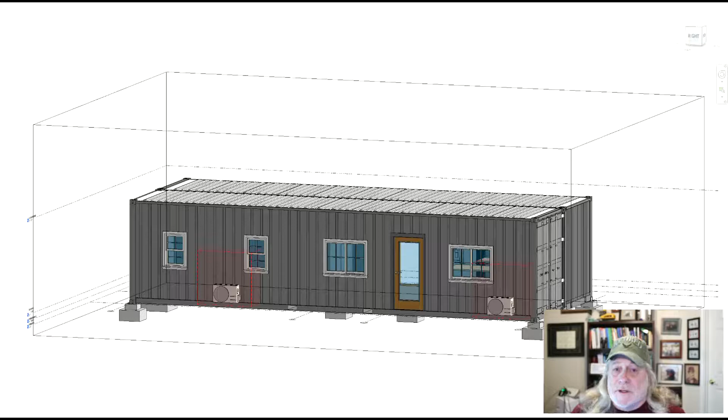The client's name is Across the Way Custom Construction, which is a bit of a tongue twister for me, so you have to forgive me for that. And let's go ahead and get started and talk about this.

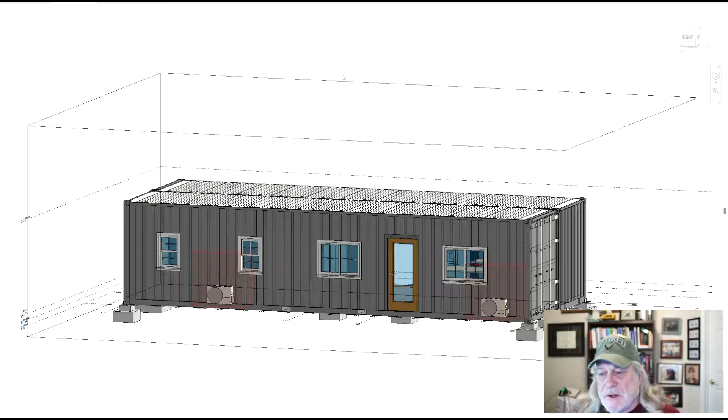Okay, here's our basic structure, and I'm taking a look at it from the outside and got a 3D view here. So let's go ahead and take a look around it. This is basically just two containers together. Two 40-foot, what are known as high cube containers. They're 9.5 feet high instead of 8.5 feet high, which is a standard cube container.

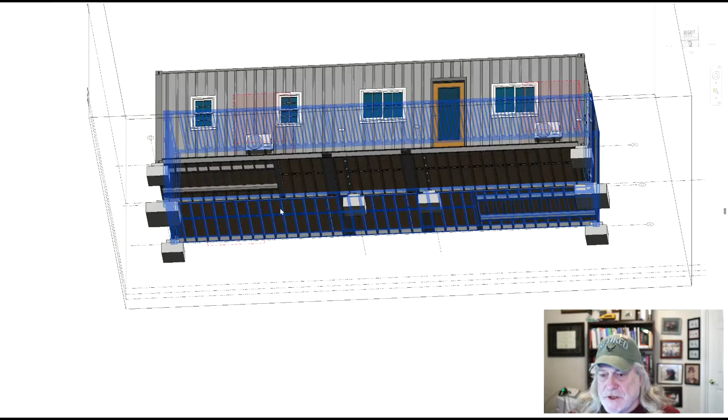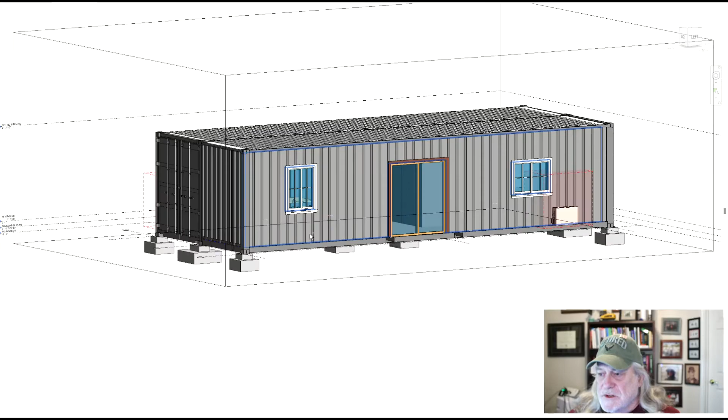I've got foundations at the corners, obviously, and I had to put two foundations along the center line because we're taking out a lot of the wall in the center, so that eliminates a good deal of support we have along that axis. And pretty simple, just a couple of windows, sliding door in the back, a couple of windows in the back. It's not going to win any architectural awards.

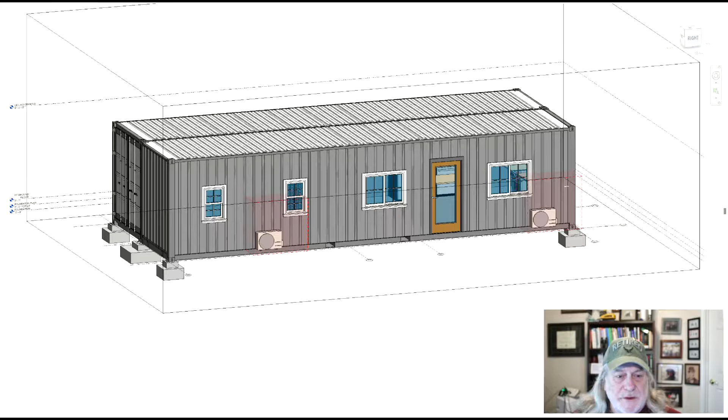There's probably those of you with architectural background that are having a fit about this right now, but you know what? It's inexpensive to build, and it's very useful. So let's take a look at the ground floor of how it looks. Oh, thank you. And we'll save the project.

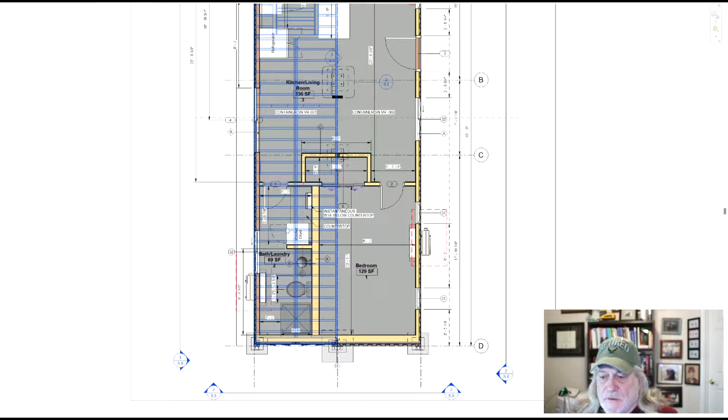Okay, basically we've just got a simple kitchen. Let's go ahead and color it in, see if that makes it easier to see. Yeah, there we go. It's simply a kitchen with a dishwasher, range, sink, got a little island here, and it's one bedroom, and you have a bathroom with a laundry room with the washer dryer combination, and I'm using an instantaneous water heater.

And the reason I'm doing that, let's see if I can get a pointer out of this thing. I can't. Okay, well, sorry about that. I'm using a washer dryer combination to cut down on the space, and we're using an instantaneous water heater below the countertop here that we've got next to the washer, because of two reasons.

Instantaneous water heaters take up much less space than the traditional water heater, and also for energy conservation. You're using a lot less energy with an instantaneous water heater. I like them much more than your traditional tank water heaters, because you're not heating 40 gallons of water 24 hours a day when it's used maybe 2 or 3 times a day. So it's a much more efficient system for energy use.

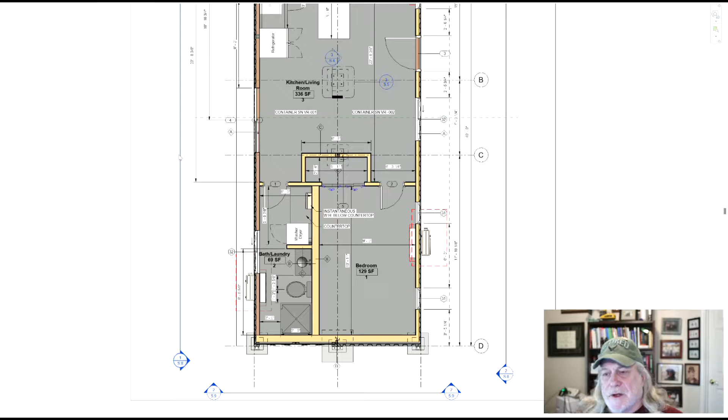The downside is, of course, it takes a lot of electricity, so I had to do quite a bit of wiring. It's better if you've got natural gas, but we're not putting natural gas in these units. These are total electric. And there's really not much else to talk about here. I have a ceiling plan that's here, and just our different views that we've got. That's about it.

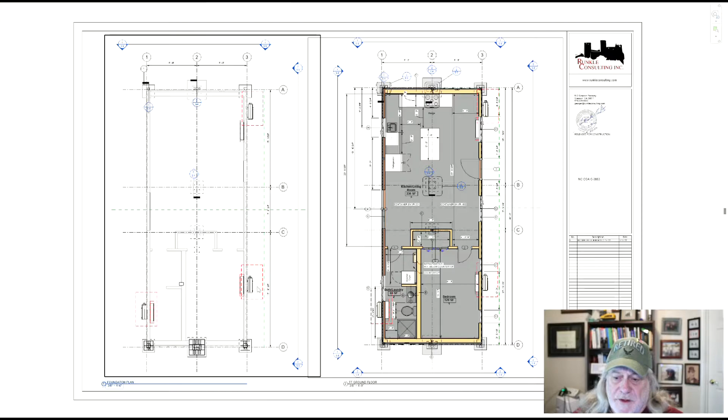I'll go ahead through the plans here, since this is turning out to be a very short video. We'll go ahead and show some of the plans that we've got. This is your foundation plan over here. Very simple foundation plan. You got your ceiling framing. Very simple. There's not much to it. The way the ceiling is framed, let's go ahead and take a look at that.

Also, what I'm doing is I'm stiffening up the center member here with some angles, and then I'm just using standard Simpson hangers to hang the 2x joists that I've got. And since I'm not doing anything structural with the framing, I can use cheaper framing. I'm using number 3 grade for the ceiling joists because I'm not carrying anything. And I'm using stud grade for framing out the walls.

And we've got some pretty serious insulation here using closed cell polyiso. I kind of like the idea of using the closed cell insulation instead of using the batt insulation because it forms its own vapor barrier. What I'm kind of concerned with is getting condensation right on the inside of these corrugations, and then the insulation gets wet,

and that is probably not going to happen in Arizona because this is going to be hotter than hell. But we could possibly get condensation on the other side right against the sheetrock. And if we've got a closed cell insulation, we don't have to worry about dampness getting into it and all the problems that it causes.

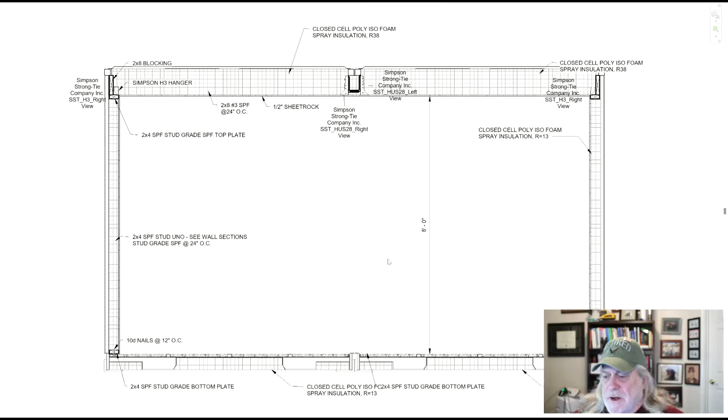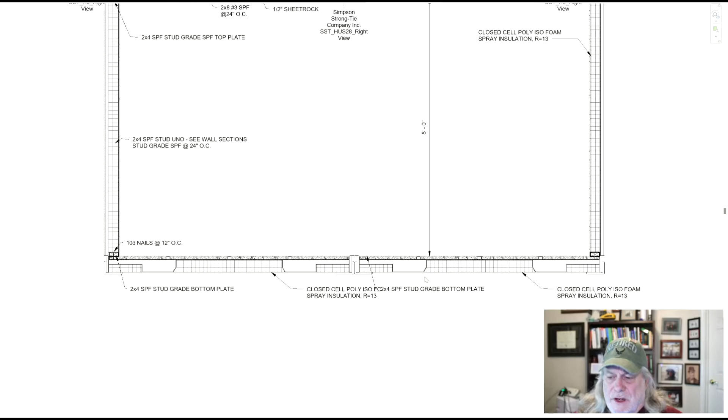And also at the bottom, we've got the closed cell poly insulation. That is critical. You've got to insulate the bottom of these containers because otherwise your floor is going to be hot and it's going to heat up the inside. So it's going to have to be sprayed from the bottom, which is going to be kind of a headache in manufacturing, but it's not something that can't be done. You can lift this up with a forklift, get underneath of it and spray and get it insulated. The other thing is for energy code, we've got to be insulated here anyway. So that's pretty much it.

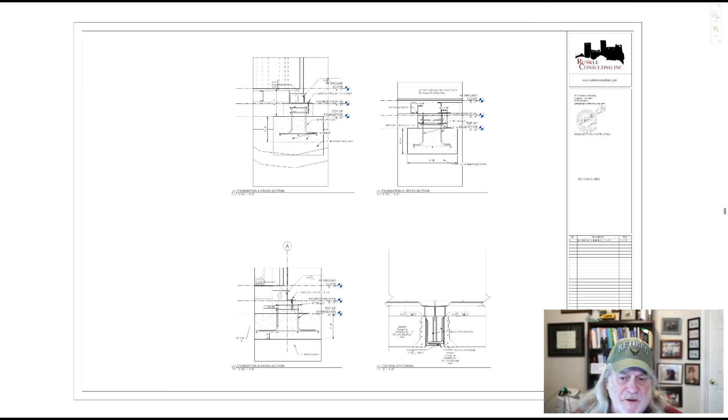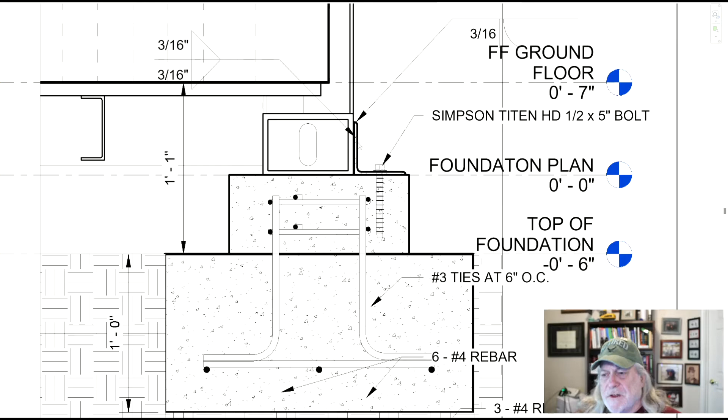The foundations are just your standard concrete foundations. Now what I've done here is I don't have it going on a base plate. Don't really need to. I've got a 7x7 corner casting that's sitting right there that performs the part of a base plate. So all I'm doing is I'm putting an angle that I'm anchoring into the foundation and then welding it to the corner casting to hold the container in place.

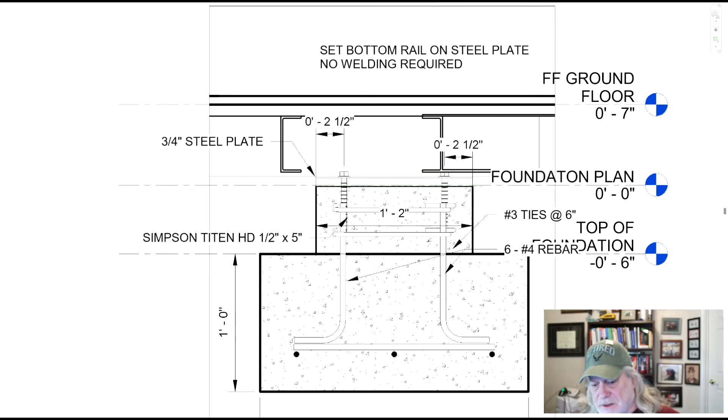And then the center foundations, what I've got to do is I've got to shim between the top of the foundation and the bottom of the bottom rail. So let me see if I can illustrate this better by shading this. There you go. And you can see this a little better. We're putting in a 3/4 inch steel plate on top of the foundation to shim underneath this bottom rail. I'm still going to get a very tiny space here, but it's nothing really to be concerned about.

Okay, so that's it. And it's not going to win any awards, but it's going to be relatively inexpensive to build, and it's going to be extremely practical. And it can be used in a number of locations. You could use it for possibly workforce housing for single people that are looking for more moderately priced housing. You can use it for an Airbnb, which is really nice for an Airbnb. You don't need a lot of room when you're just spending a couple of days in an area.

And here, one of the things, I've stayed in these as an Airbnb, and there's some nice stuff about this. Let me go back to my floor plan and talk about it. You have a separate bedroom. It's not like staying in a hotel where you've got the bedroom and that has everything. You've got a separate bedroom, and you've got actual cooking surfaces. So if you're staying here for an extended stay, you have room to cook.

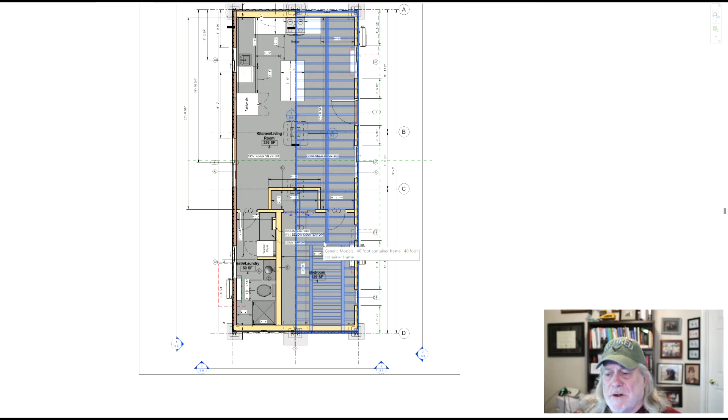You have a countertop here. You can put furniture in here. You can put in a tabletop. It gives you a room to work. You can entertain people here without having them coming in where you're sleeping, which is always an uncomfortable thing if you're staying in a hotel and people come up to your hotel room.

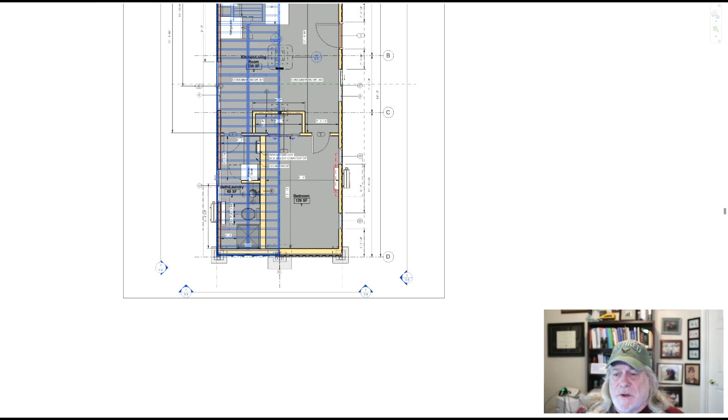And the other thing that's nice about this is it's including its own laundry room. So if you need to wash your clothes, again, if you're in an extended stay for a few weeks, if I'm staying in a place more than about 5 days, I don't bring a change of clothes for the entire time. I do my laundry. And it's always kind of a hassle in a hotel to have to go down to the laundry room on the first floor or wherever they put it to do my wash, if they have a laundry room; some of these places don't. You have your own laundry room with a washer and dryer in here, which makes it much nicer.

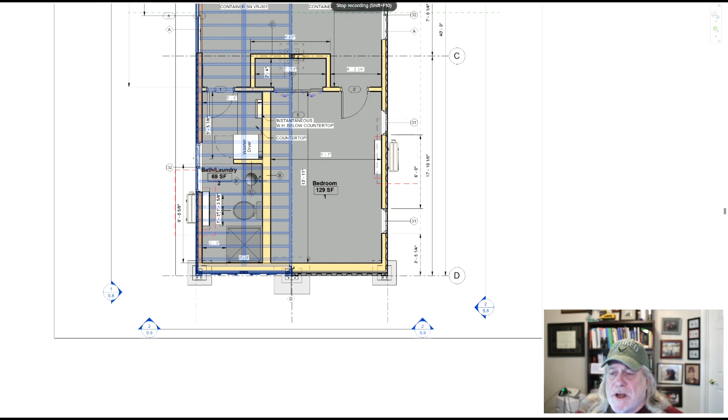The downside is, of course, you can't fit a bathtub in here. This shower is your minimal size shower that you can put in here. The problem is I have to have 2 foot from the area to enter the shower to the wall. So I'm stuck with a pretty small shower, 3 by 3 foot shower. Okay, so that's it. And again, Frank Lloyd Wright wouldn't be designing this, but we're not looking for that kind of audience.